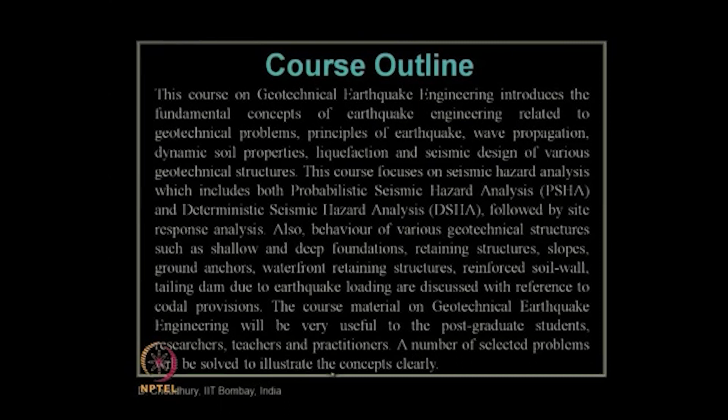The course material on geotechnical earthquake engineering will be very useful to postgraduate students, researchers, teachers, practitioners, etc., and a number of selected problems will be solved to illustrate the concepts of this entire course very clearly. So, with that course outline, let us see what are the basic course contents which we will be covering in this Geotechnical Earthquake Engineering course.

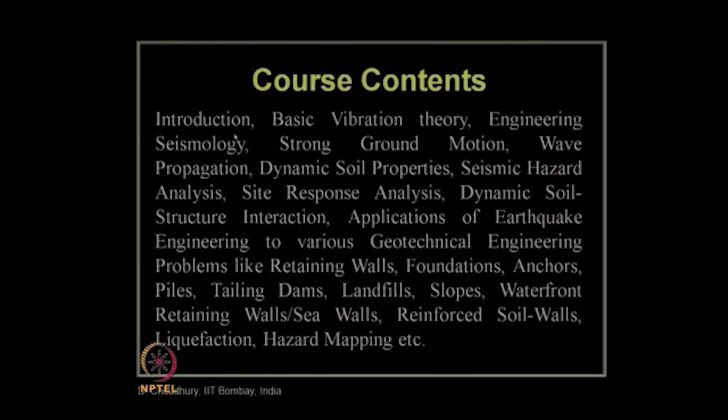These are the basic course contents: first it will start with the introduction to the topic, then basic vibration theory will be covered, engineering seismology, strong ground motion, wave propagation, dynamic soil properties, seismic hazard analysis, site response analysis,

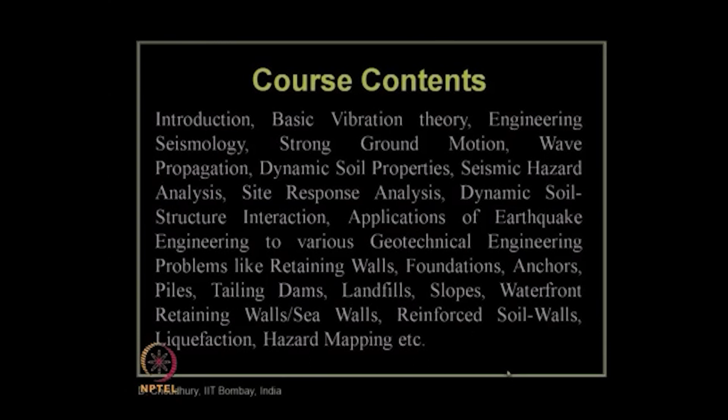dynamic soil structure interaction, and applications of earthquake engineering to various geotechnical engineering problems or design related issues for retaining walls, foundations, anchors, piles, tailing dams, landfills, slopes, waterfront retaining walls or sea walls, reinforced soil walls, then liquefaction criteria and various seismic hazard mapping etc., will be discussed in this course on geotechnical earthquake engineering.

Now, let us see how we have divided this course into various modules. This entire video course on geotechnical earthquake engineering has been subdivided into various modules, and a total of about 9 modules have been created for this course. Let us see what those modules contain for this video course.

So, total 9 modules. Module 1 will be covering the introduction to geotechnical earthquake engineering. Then module 2 will discuss the basics of the vibration theory. In module 3, we will be talking about engineering seismology. Module 4 will discuss the strong ground motion. Module 5 about wave propagation. In module 6, we will talk about the dynamic soil properties. In module 7, seismic hazard analysis.

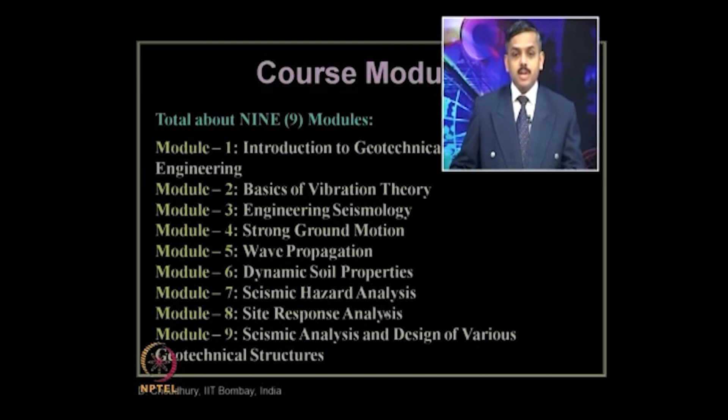In module 8, site response analysis, and the last one, module 9, seismic analysis and design of various geotechnical structures. Let us remember that each of these modules will also comprise several lectures and will cover several subtopics.

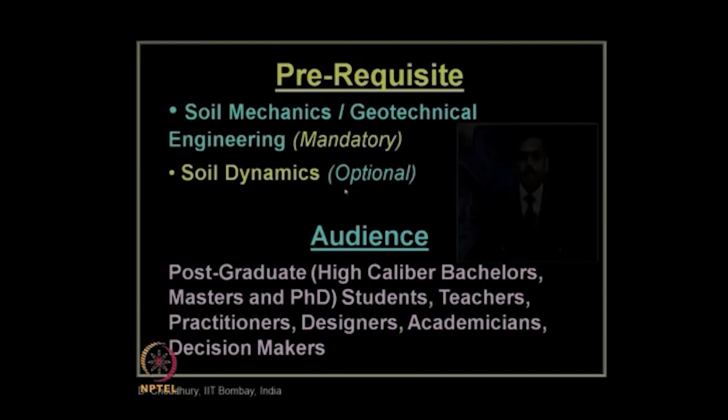So, if somebody has gone through that soil dynamics course, they will be in a better position to understand this geotechnical earthquake engineering course in an easier or simpler way. That is why I kept it optional, but it is always preferred that somebody listening to this geotechnical earthquake engineering video course will first go through the NPTEL video course on soil dynamics to clarify the basic dynamics related to soil mechanics problems.

And who will be the audience for this course on geotechnical earthquake engineering? As I have listed over here, postgraduate students. When I am talking about postgraduate students, I am also including very high caliber bachelor students, those who are interested to know about geotechnical earthquake engineering, which is a very modern topic compared to other conventional subjects in this area. So, those who are in their 4th year of the bachelor's degree can also go through this course.

Also, master's students in geotechnical engineering and in structural engineering can go through this course, because for earthquake resistant design of any structure in civil engineering, we need to know not only the superstructure behavior during an earthquake, but also the substructure behavior, because ultimately the structures will be standing on a firm foundation. So, unless we know the behavior of this foundation and the surrounding soil media, it will not be a complete design against the earthquake. That is why for structural engineering students also, this is a better course to understand geotechnical earthquake engineering problems.

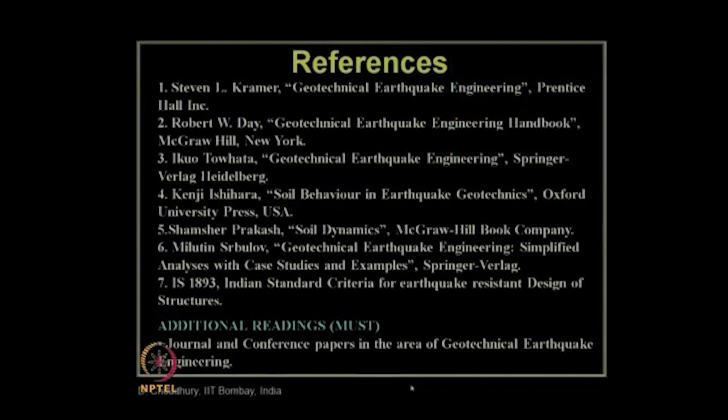Now, let us start our course with our first module, that is module number 1, which is Introduction to Geotechnical Earthquake Engineering. In this first module, let us first go through what are the basics of geotechnical earthquake engineering, or why we should take this course. What is the need for taking this course? What are the basics behind it? Let us go through quickly.

But we should always remember one important aspect, that the earthquake never kills, because suppose the earthquake occurs in a desert where no human being is living, that is in an open area, then obviously there is no chance of damage to any structure, because at those locations there is no structure at all. So, we cannot say that an earthquake kills human beings or other living animals, etc.

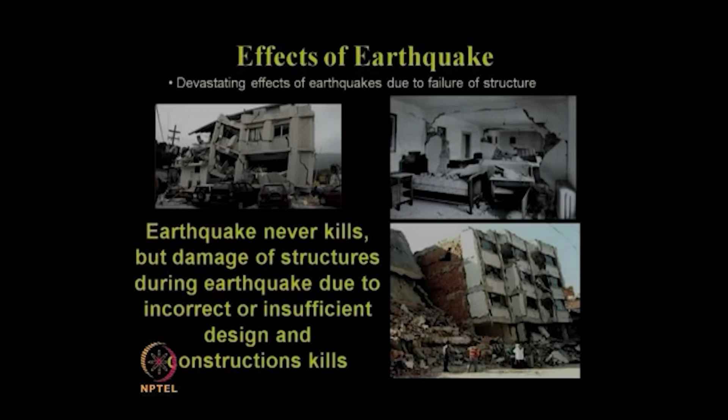So, why does this collapse of the structure occur during an earthquake? One reason is either it was incorrectly or insufficiently designed and constructed. So, it is not only due to the design or due to the construction, it can be an and/or situation, that is either the design can be incorrect or the construction or materials can be incorrect, or the combination of them can be the reason which makes the structures collapse during an earthquake, which finally creates severe damage or devastating effects, or kills human beings and causes loss of life.

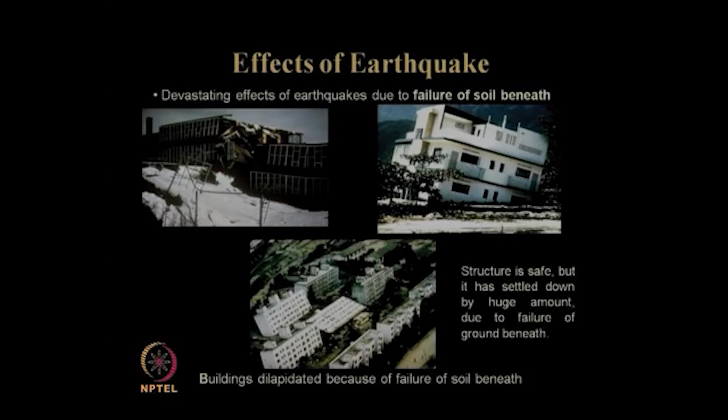Now, another effect of earthquake can be named as tsunami. So, what is tsunami? Let us first understand this word. This picture shows the disaster of a tsunami. It is a series of water waves caused by the displacement of a large volume of a body of water, typically in an ocean or in a large lake. So, it occurs in a large water body, either an ocean or sea or a very large lake. Tsunami is a Japanese word with the English translation harbor wave, because this word can be broken in two parts: tsu, T-S-U, means harbor, and nami, N-A-M-I, means wave. So, that is why it can be called harbor wave.

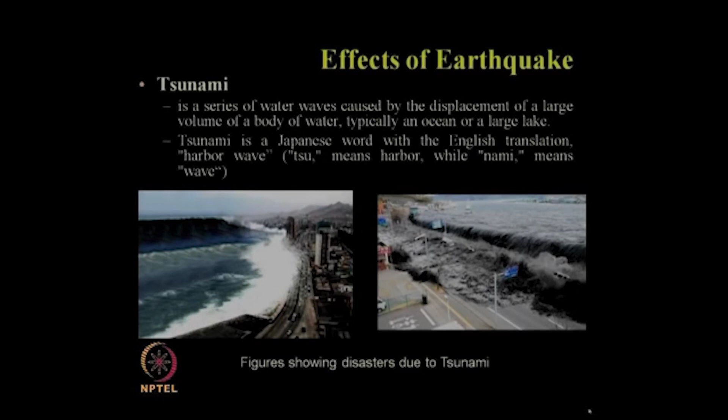So, how to design the sea wall or the waterfront retaining walls? We have to be careful to consider these aspects of earthquake and tsunami, which we will be discussing in this course of geotechnical earthquake engineering. Now, let us see what are the various principal damages of earthquake.

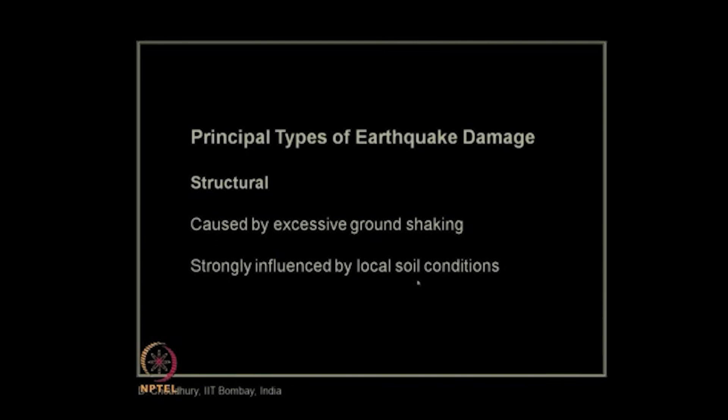So, if we categorize the principal types of earthquake damage, there can be structural damage, which can be caused by excessive ground shaking, or it can be strongly influenced by the local soil conditions. So, how does this local soil condition influence the structural damage? Let us see a few historical examples.

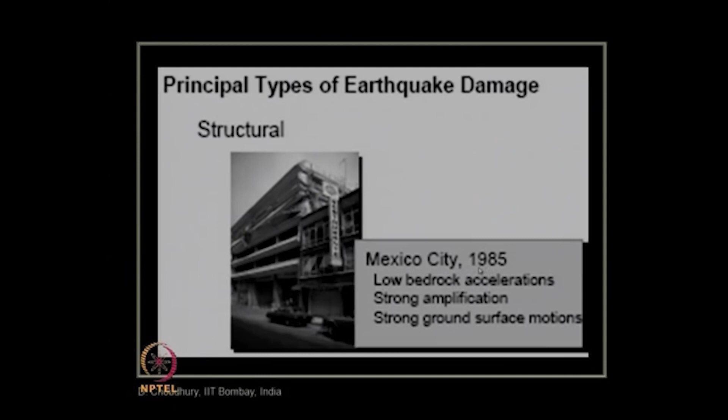Like the structural damage that occurred during the Mexico City earthquake, which is a very well documented earthquake, which occurred in 1985 in Mexico City, in the country Mexico. In that earthquake, actually at rock level, the earthquake acceleration that hit the site was a pretty low bedrock acceleration. That is, the earthquake acceleration at bedrock level, far below the ground surface, was pretty low.

So, for obvious reasons, people thought that it probably may not cause much structural damage to the buildings standing on the ground, because the original seismic acceleration was pretty low. But in this case, the local soil condition amplifies it, which is known as strong amplification, that is, these small accelerations get amplified when they reach the ground surface, and because of that, the high seismic acceleration makes the structures collapse.

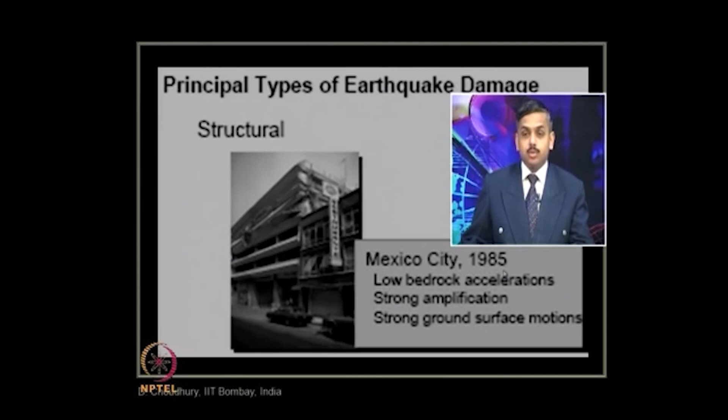So, finally, huge earthquake damage occurred after this Mexico City earthquake, though the basic input acceleration was pretty low. So, very strong surface ground motions finally created the entire damage in the 1985 Mexico City earthquake.

Another example of the soil related problems of a local site which caused structural damage during an earthquake is the Loma Prieta earthquake in 1989. In this Loma Prieta earthquake, whose damage is shown over here, the basic input or bedrock level earthquake acceleration was also a modest value, not so large a value as to cause serious or major damage to the structures on the ground.

But again, the soil condition was majorly responsible for creating a strong amplification, which increased the basic input bedrock seismic acceleration to a larger value, which finally created damage to the structures. So, that strong ground surface motion also created the damage in this Loma Prieta 1989 earthquake.

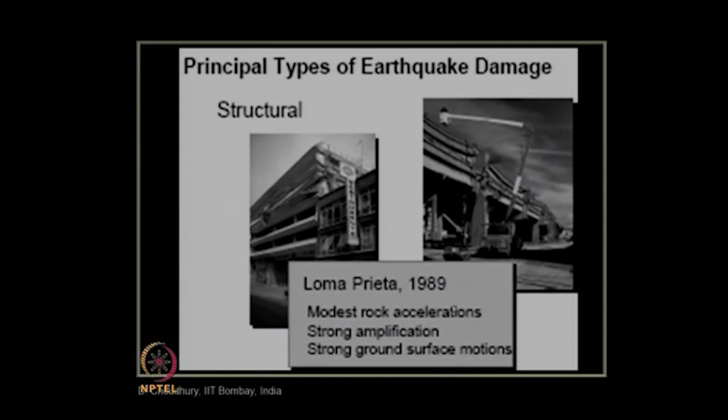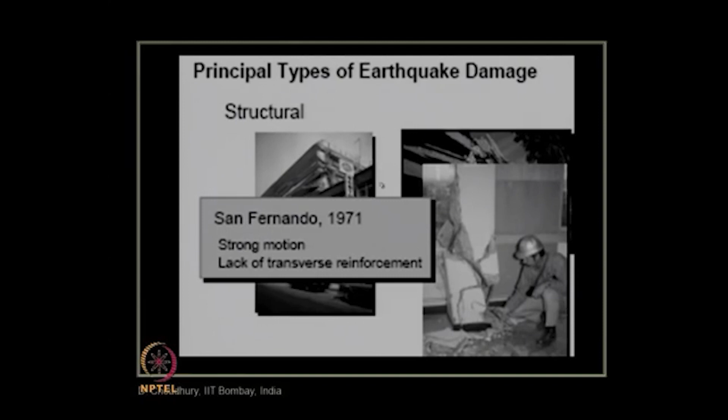Then another example of structural damage occurred during the San Fernando earthquake of 1971. You can see the picture of the structural damage. That was because of the strong earthquake motion, and there was a lack of transverse reinforcement. Unless we put the transverse reinforcement properly in the design, it can create major structural damage in terms of earthquake related issues, which occurred in the San Fernando 1971 earthquake.

So, let us see what are the various points which we need to discuss during this course of geotechnical earthquake engineering. Ground shaking is one important aspect, because it shakes the structures which are constructed on the ground, and finally causes the structures to collapse. So, ground shaking is an important criterion which we have to look into.

Then as geotechnical engineers, we have to go through this criterion which is called liquefaction. What is liquefaction? In common terminology, it is nothing but the conversion of a formerly stable cohesionless soil to a fluid mass. So, it causes damage to the structures. So, as I have mentioned in this sentence, what happens?

A cohesionless soil, typically below the water table, will start flowing as if it is a fluid or liquid. So, there is no effect of the solid grains which can support the structure or foundation standing on that soil. So, obviously, if the soil gets liquefied during an earthquake, entire damage of the structure can be expected.

Landslide is another problem addressed by geotechnical earthquake engineers. This landslide can be triggered by vibrations, and one source of vibration can be the earthquake.

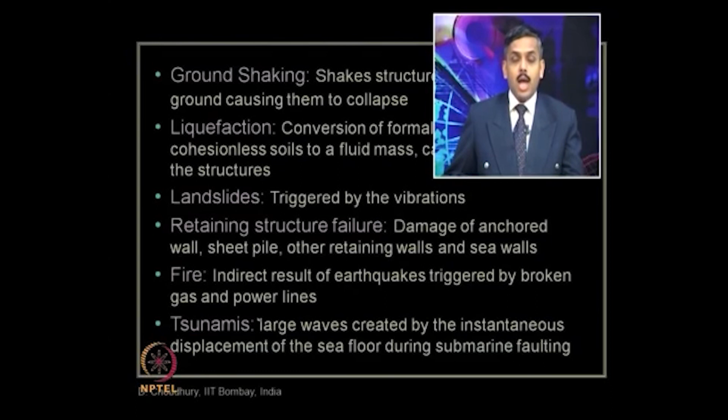Like tsunami, as already mentioned, large waves created by the instantaneous displacement of the sea floor during submarine faulting or earthquake induced faulting effect. So if there is a vertical movement, instantaneous displacement of the floor bed of the sea or ocean or a large water body, then large waves get created, which finally reach the shore, and they can be called tsunami or harbor wave, as we have seen just now.

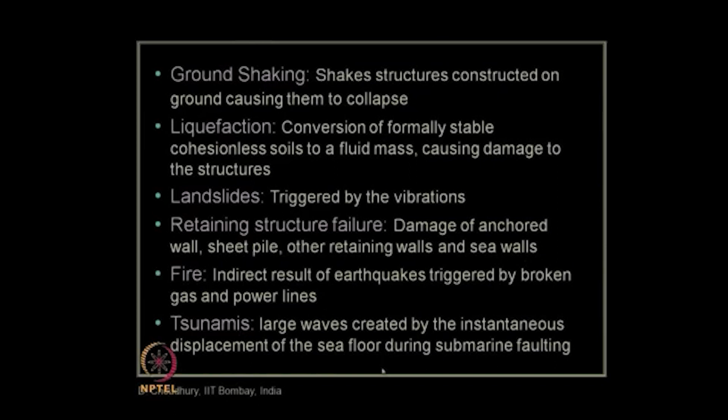So this can be another sub effect of earthquake, which also needs to be addressed to design sea walls and waterfront structures by geotechnical earthquake engineers.

So when we are discussing damages due to earthquake, let us see what are the various effects. Earthquakes have varied effects, including changes in geologic features, damage to man-made structures, and impact on human as well as animal life. So earthquake damage depends on many factors. These four are the major factors which can be listed as the reasons for earthquake damage.

First important factor is of course the size of the earthquake, that is how big an earthquake is. If the earthquake is of bigger magnitude, in a quite common way we can say that probably it will create large damage. Why probably? Because there are various other parameters also involved. We will learn that not only the magnitude or amplitude matters, it also matters how long that magnitude or earthquake duration is lasting. So duration is also important, and how much frequency it contains during the earthquake. These are also important parameters we will see during discussion in this course in other lectures. So size of an earthquake overall matters a lot when we talk about earthquake damages.

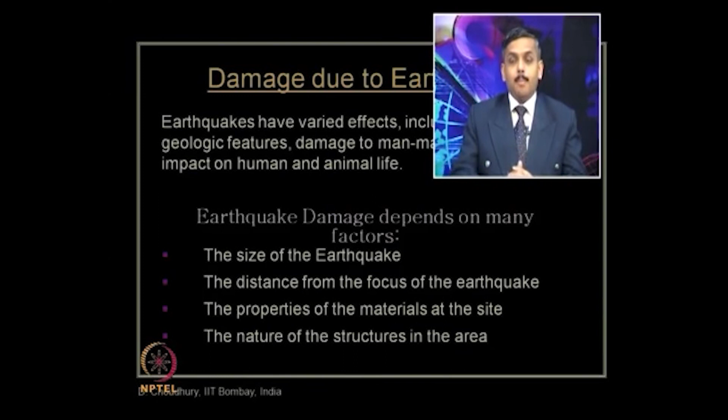Also, the nature of the structures in an area is an important factor deciding the amount of earthquake damage. For example, if an area has more mud houses or non-engineered structures, like masonry without beams or columns, then major damage will occur during an earthquake, compared to the same site having better engineered construction with reinforced columns, beams, slabs, properly designed buildings, which will suffer lesser or no damage. So, the type of structure located at an area decides how much earthquake damage will be created at that site.

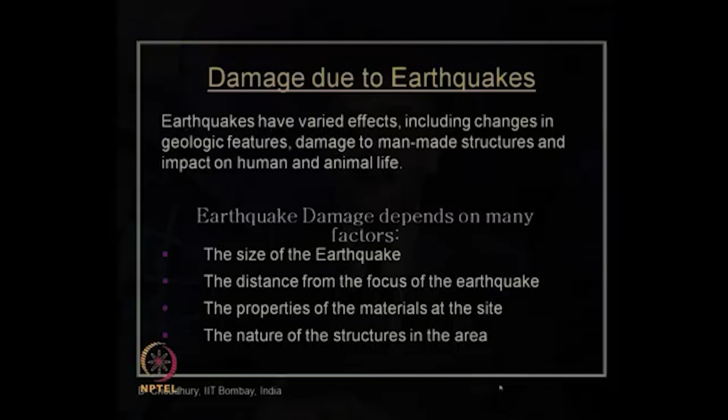Now let us discuss ground shaking. Frequency of shaking differs for different seismic waves. During an earthquake, when energy is released from the hypocenter or focus, the origin point of the earthquake energy, various seismic waves start traveling through the media, in rock or soil, whatever media they are generated through. These seismic waves have various amounts of frequency.

Frequency of shaking differs for different seismic waves. High frequency body waves travel through a body or media, much below the ground surface, not close to the free surface. These are body waves like primary and secondary waves, and they shake low rise buildings more, like single story or one story buildings. Whereas low frequency surface waves travel close to the ground surface, like Rayleigh waves and Love waves.

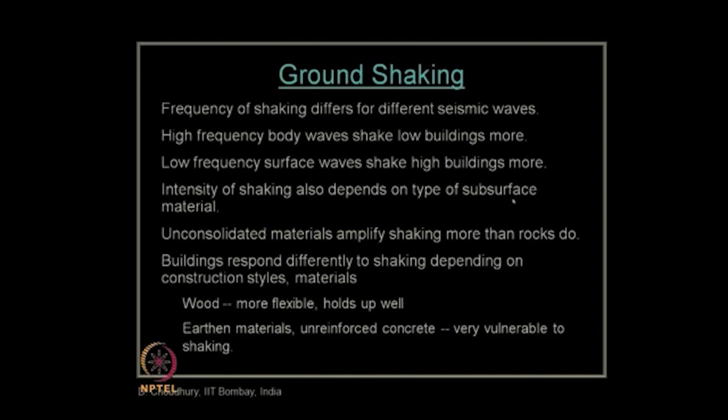Intensity of shaking also depends on the type of subsurface material, whether it is soil or rock. If it is soil, whether it is stiff or soft, loose or dense, these criteria decide how much intensity of ground shaking occurs at a particular site. Unconsolidated materials amplify shaking more than rocks do. Unconsolidated means material that has not consolidated or settled completely, for example very soft clay material in an unconsolidated state, which amplifies ground shaking much more than rocks.

Rock generally does not amplify much the input ground or base level shaking, but unconsolidated material or soft soil will amplify or increase seismic acceleration as it passes through. That is why we have to be very careful about soft or unconsolidated material if it exists below our site of concern where we are going to construct any new structure.

Buildings respond differently to shaking depending on construction styles and materials. For example, wood is more flexible and holds up well during earthquake shaking. That is why in earthquake prone regions or hilly terrains, mostly wooden houses or constructions are preferred.

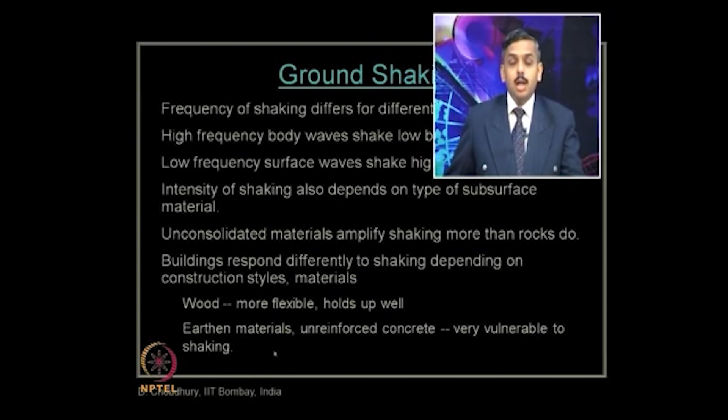This is the picture after the Fukui earthquake in 1948. This earthquake occurred on June 28th, a Monday, at 16:13 local time in Japan, with local magnitude 7.1 and distance from the epicenter of 0 kilometers, so it was located at that site itself. The number of deaths during this earthquake was more than 3,500 and injured was more than 20,000, showing how much damage occurred in those days.

The collapse ratio of houses was almost 100%, meaning almost all houses collapsed. The affected area was 20 kilometers north-south by 10 kilometers east-west of the Fukui plain. In this entire area, all the houses located there collapsed 100% due to the earthquake.

There was damage to pile heads of the Hokuriku Haiden building, with shear cracks occurring. This relates to our geotechnical earthquake engineering. When designing a pile foundation, we should learn from these previous experiences of foundation damage so that we can incorporate proper steps in design.

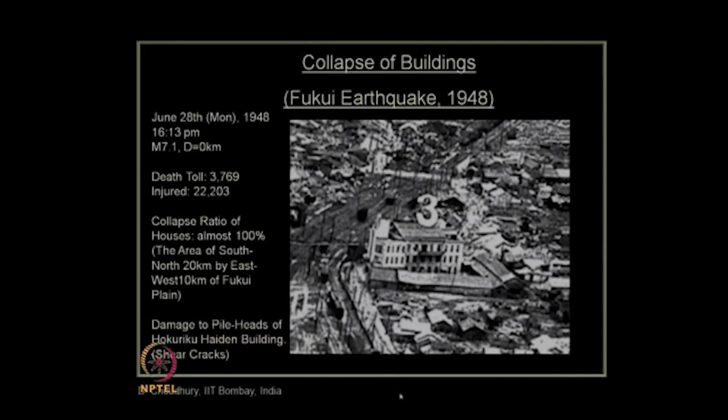Some other pictures of the Fukui earthquake collapse of buildings in 1948. This shows damage to the pile foundations of the Hokuriku Haiden building caused by the 1948 Fukui earthquake. You can see the damage to the piles, the shear cracks - these are severe damages of the pile foundations, and settlement of the first floor occurred.

The entire first floor settled and effectively became the ground floor. Cracks appeared at the column heads of the second floor and the floor slabs of the first floor. This is the huge damage that occurred during this Fukui earthquake.

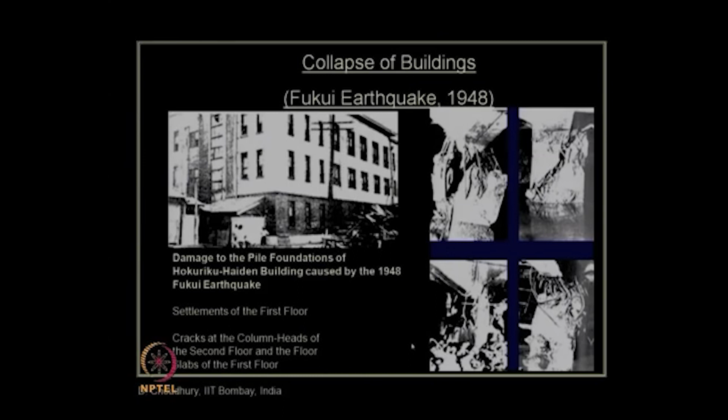This is another effect of soft first story or inadequate shear strength. Generally in earthquake engineering, we must avoid this soft first story, which is the ground floor generally used as an open basement. If we use that soft first story, it creates maximum collapse when a major earthquake occurs at that site, because of no bonding or adequate connections between the members.

So it is always preferred to provide some bracing system or connection system to avoid this soft story effect, which occurs where there is no infill wall or no in-between columns. To avoid this soft story effect, we should always provide bracing members or connections so the place can still be used as a parking lot or basement area for open activity, while avoiding the soft story effect.